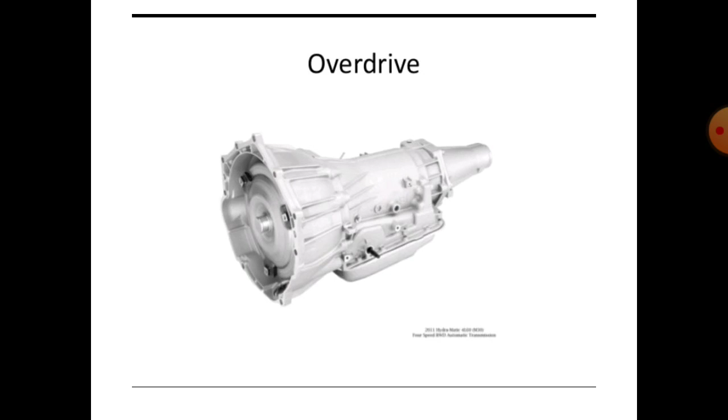In our automobile engineering subject, we have to discuss our transmission system. So, the next topic is overdrive. Okay, so the overdrive you have to see in the diagram, right?

So the input shaft, you have to see this input shaft is connected to the sun gear and also a free wheel clutch, right? So in this sun gear a carriage or carrier are connected, okay, and that sun gear are fixed with the ring, and that ring is connected to the output shaft, right? So that is the simple construction of our overdrive.

Okay, so overdrive is a device to set the gear ratio in the car. It is fitted in between gearbox and propeller shaft. This results in less wear of the engine parts and decreased vibration and noise, as the friction losses at the lower speed are less. There is a saving of fuel also with the overdrive. Overdrive is generally fitted on top gears only.

Working of overdrive. To understand the working of overdrive, it consists of an epicyclic gear train in which the sun gear is free to rotate on input shaft, while the carrier can move on the splines on the input shaft. A free wheel clutch is also fitted on the input shaft spline. The output shaft is connected to the ring.

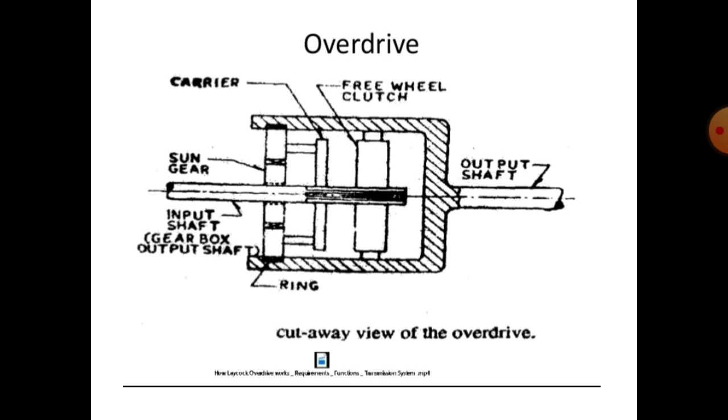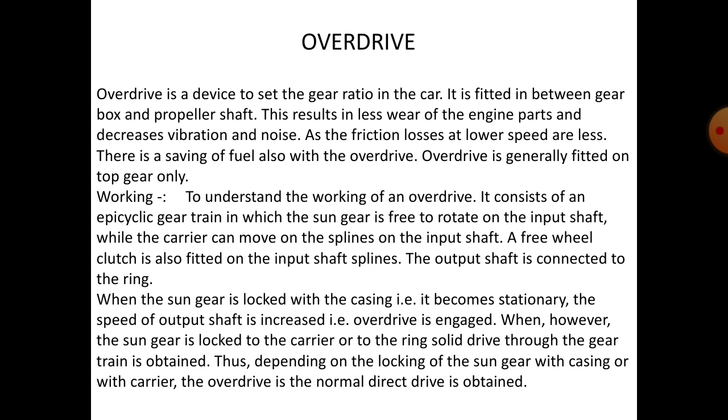So when the sun gear is locked with the casing, that is, it becomes stationary, the speed of output shaft is increased, that is, overdrive is engaged. When, however, the sun gear is locked to the carrier or to the ring, solid drive through the gear train is obtained. Thus, depending on the locking of the sun gear with casing or with the carrier, the overdrive or the normal direct drive is obtained. Right? You have to see the simple working of overdrive. Okay.

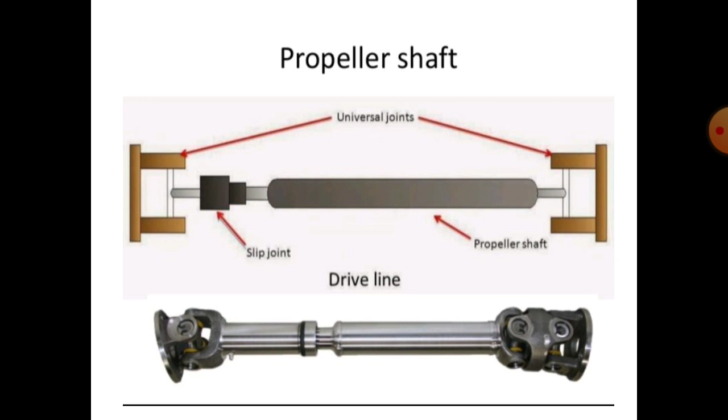Then next is propeller shaft. Right? You have to see this picture, the simple picture of propeller shaft. In this propeller shaft, there are three types of parts or components, right? Two universal joints, one slip joint, and one propeller shaft. These are the three components or parts in propeller shaft.

So first, the shaft: as this has to withstand torsional loads, it is usually made of tubular cross section. It also has to be well balanced to avoid whirling at high speed. Shafts are made of steel, aluminum or composite material.

You have to see in this diagram the propeller shaft, right? A simple tubular shaft is over there, and then a well balanced shaft is over there to avoid the whirling at high speed. Means when the high speed is generated, the shaft does not whirl, because a well balanced shaft is produced. Then next is universal joint.

One or two universal joints, depending upon the type of rear axle drive used. The universal joint accounts for the up and down movement of the rear axle when the vehicle is running.

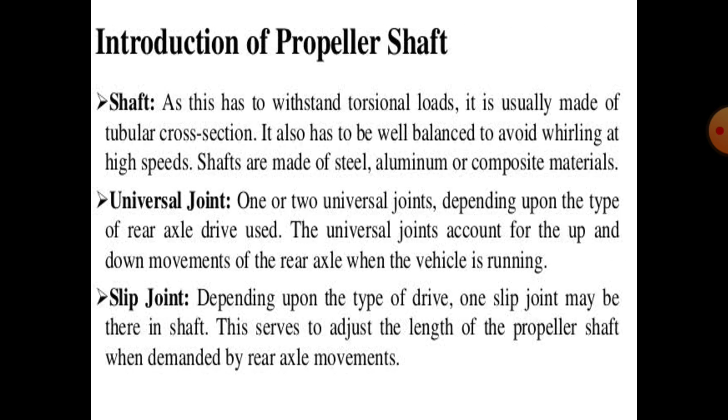Then construction details of propeller shaft. The propeller shaft is used to transmit the power from gearbox output shaft to differential, with tubular cross section and one or two piece construction.

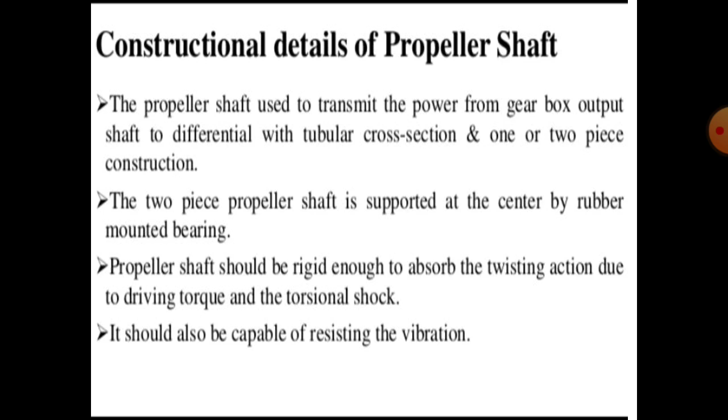The two-piece propeller shaft is supported at the center by a rubber mounted bearing. Okay. Then second, the propeller shaft should be rigid enough to absorb the twisting action due to driving torque and the torsional shock. It should also be capable of resisting the vibration, right?

Then a tubular propeller shaft is generally used because, now it is simple.

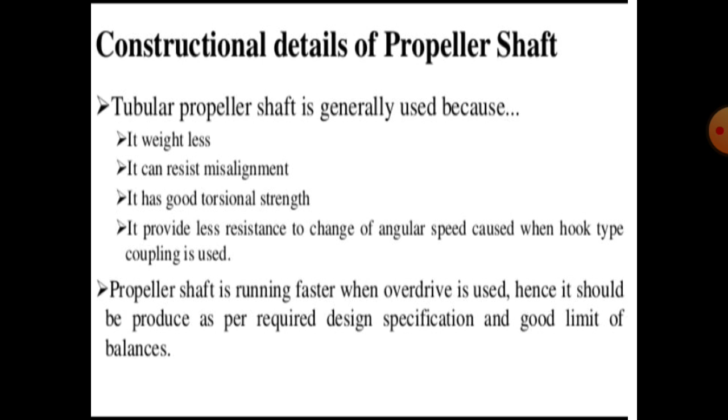Then the propeller shaft is running faster when overdrive is used, hence it should be produced as per required design specification and good limit of balance. So these are the simple points on why propeller shafts are tubular or hollow.

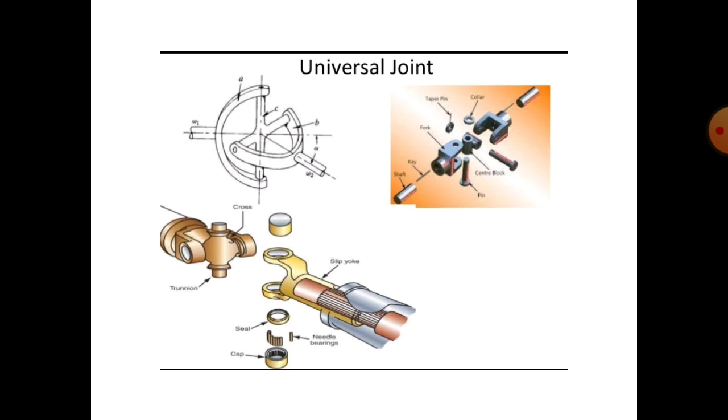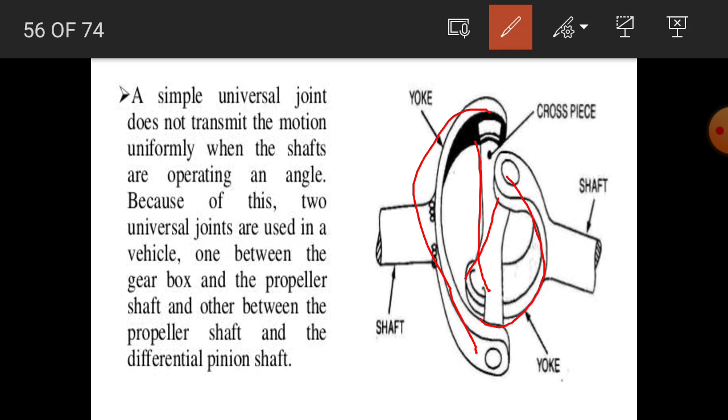So look at the universal joint, now in a universal joint there are two yokes, right. You have to see in this diagram the yoke at this one and this one. Okay, this one is one yoke and second is the second yoke. Then the cross piece, these are the cross piece. Okay, then in this cross pin, cups and keys are used, right.

So a simple universal joint does not transmit the motion uniformly when the shafts are operating at an angle. Because of this, two universal joints are used in a vehicle, one between the gearbox and the propeller shaft, okay, and the other between the propeller shaft and the differential pinion, right.

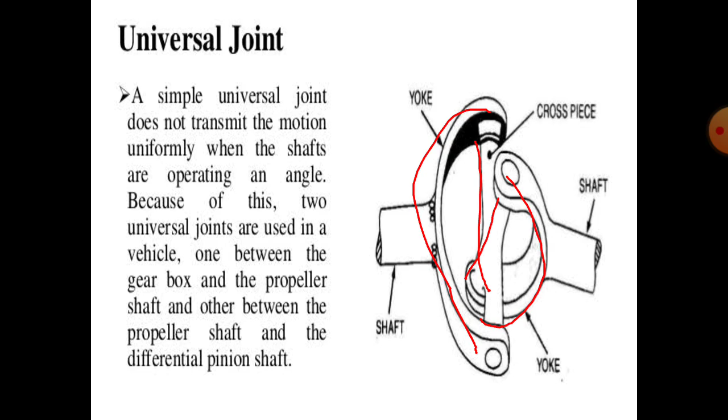Simple. Then next, universal joints allow driving torque to be carried through two shafts that are at an angle with each other. A simple universal joint consists of two Y-shaped yokes, one on the driving shaft and the other on the driven shaft. The four arms of the spider are assembled in needle bearings in the two yokes. The driving shaft and yoke force the spider to rotate.

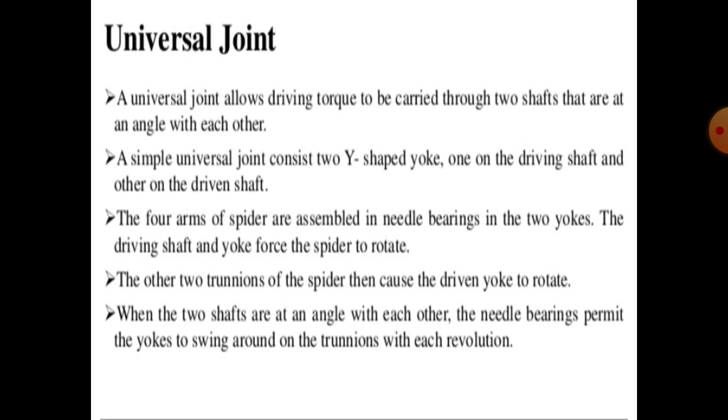The other two arms of the spider then cause the driven yoke to rotate. When the two shafts are at an angle with each other, the needle bearings permit the yokes to swing around on the trunnion with each revolution. Okay, next point is slip joint, right?

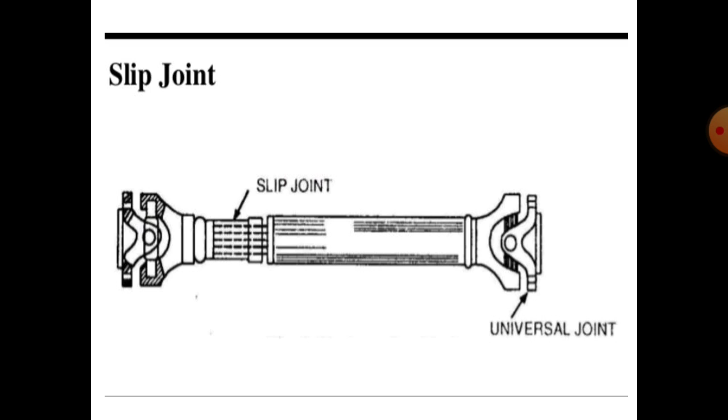The slip joint is in between your universal joint and your propeller shaft. Okay, you have to see this diagram: propeller shaft, universal coupling. Okay, the slip joint is attached to the driven yoke in order to increase or decrease the length of the propeller shaft. Okay, the slip joint is attached to the driven yoke, right, in order to increase or decrease the length of the propeller shaft.

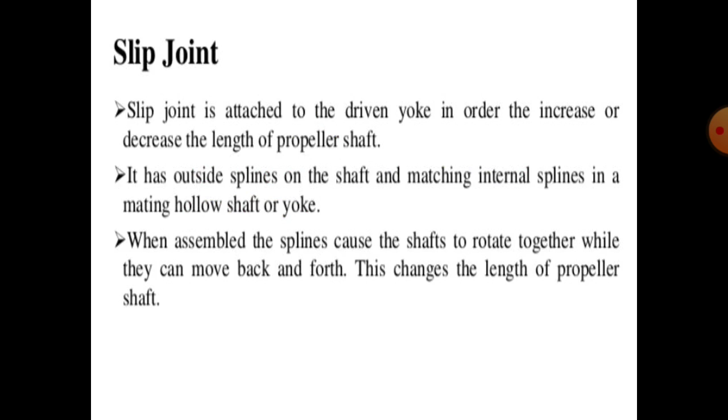Types of drive train, right? Different types of drive train we have seen in this diagram, in this lecture, right? Next time we will see the final drive. So that is the end.